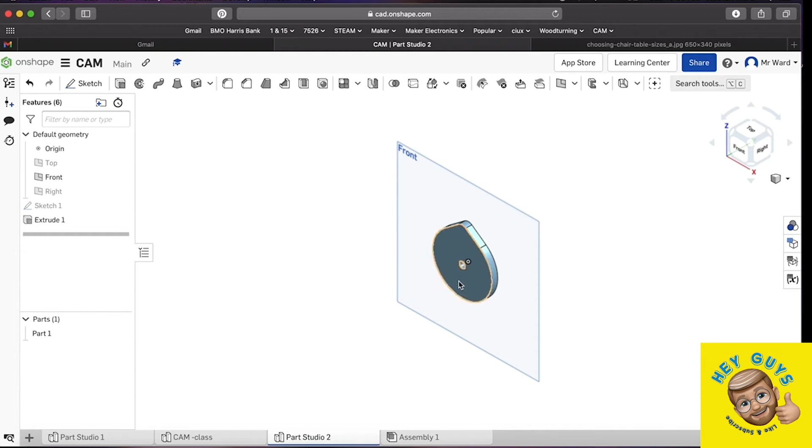So I created this cam right here. And if I needed to change the size of this cam, we all know that I would just go to the sketch, edit it, look at the sketch, and change the sizes.

But if I wanted everything to stay the same in terms of proportion to each other, but wanted to increase the size of the big arc to say a radius of 2 instead of 1.25, then I'd have to figure out the relationship between the 1.25 and that, which is pretty straightforward 1-to-1, but also from the radius of 1.25 to the small radius of 0.25. Now it starts to get a little more complicated. And you can see where if it was something more complicated like a chair, there'd be a whole lot more to change. So this is really where variables come into play and make a big difference.

So where do we find the variable tool? I showed you before where the plane tool is. If you hit that drop down, that seems to be the catch-all for everything they couldn't figure out where else it could go. Near the bottom is the tool called variable.

So if we click on that, we can see we have a number of different things to create this as. We could create a variable that's an angle or a number or really just anything, but we're going to go with length for this, and we're going to call this first one nominal size.

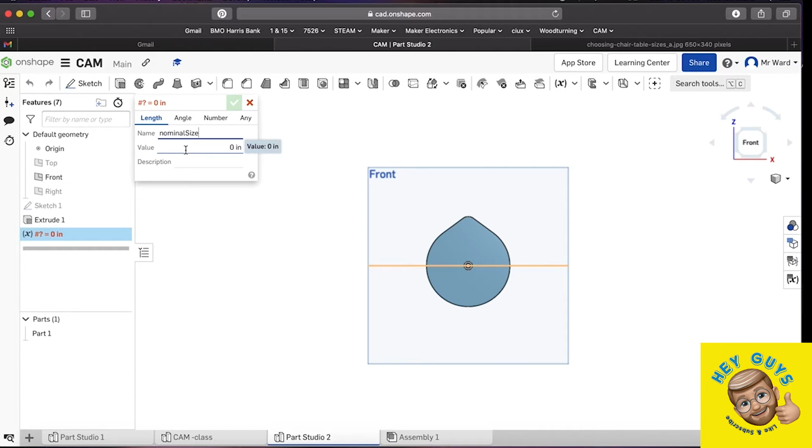If you're familiar with coding, you know that in many programs, they will only accept a single word - you can't have spaces. Sometimes you'll see an underscore used to separate words, but what we're going to do is keep the first word in all lowercase, we're going to call that nominal, and then just capitalize the second word, size. We call that camel case, because like a camel, there's a hump in the middle - the capital S gives us our hump. So we call that camel case, or bumpy case sometimes.

So if we set that nominal size to be 1.25 - why 1.25? Well, that seems to be an easy number when we consider the small radius was 0.25 and the big radius was... sorry, not 1.25, 2.5. All the original dimensions are a factor in 2.5. So 1.25 goes into it twice, 2.5 goes into it once, 0.25 goes into 2.5 ten times. And that's going to be the big deal.

So when we get to using these variables, we can use them in a mathematical expression, but it has to be in terms of being able to change the size uniformly. Our mathematical formulas either have to be multiplication or division. It can't be like nominal size plus 2, because then when we make nominal size smaller, it's still plus 2, and the proportions get weird. So it has to be either division or multiplication.

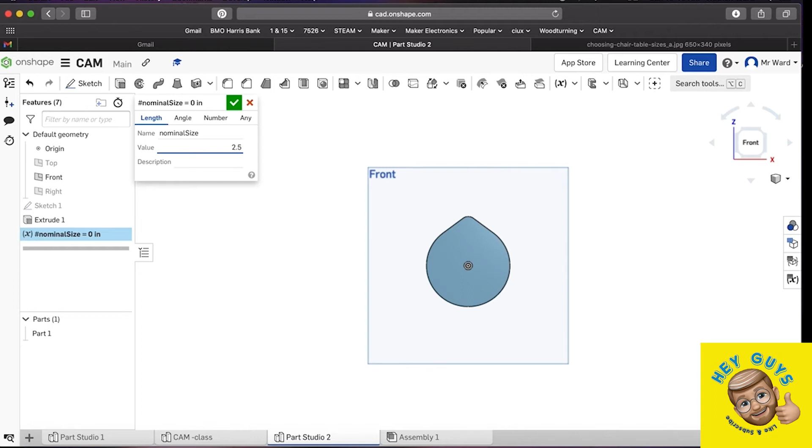So we're going to create that first, and then create another one. Now that it's on top of the list, I don't have to scroll down. We're going to call this hole diameter - just hole dia, since I don't want to write out diameter, but again using bumpy case. And I'm going to make that 0.25, because even if we change the size of the cam, we want the hole to stay the same.

And then we're going to create one more, and we're going to call that just THK - one word, which we're going to use to mean thickness, using computer autocorrect.

Let's make the T capitalized, and then maybe it won't try to change it on me. There we go. And we're going to make that 0.25. All right, that's just what it is already.

So in Onshape, here's something you got to get your head wrapped around. We created those variables down here in our features list, but our features list goes in order. So if I want to go back to sketch 1 and change these sizes to nominal to these variables we just created, the variables have to happen before we created the sketch. So if I was creating this sketch from the beginning and I knew I was going to use variables, I would create the variable first.

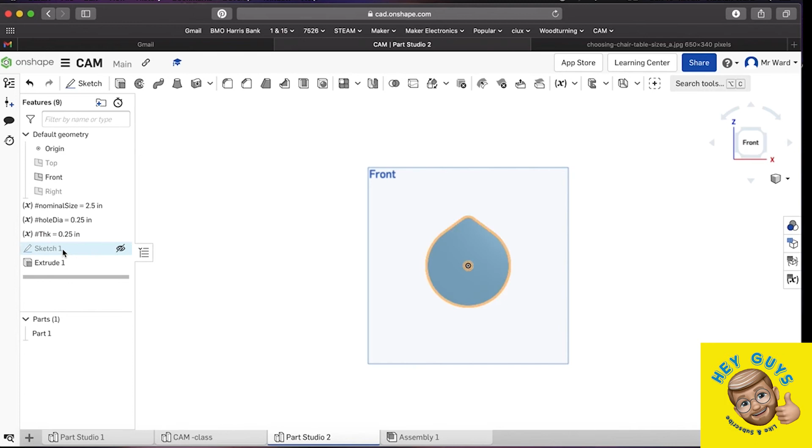Then we can go back in and edit our sketch, and instead of this being 1.25, since our nominal size is 2.5, we're going to say nominal, and as soon as I start to type it, it comes up, and I'm going to use the hashtag so that it's divided by 2. Because 2.5 divided by 2 is 1.25, right? So I'm going to hit enter, and it still stays the same, but if I double click on it, there it is, just like that.

So Onshape is always going to give me the numerical value that it is. But just know that when you double click on that, and this will be divided by 2 again, it'll show you what you entered. So don't go freaking out because, oh my goodness, it doesn't say nominal size anymore. It does, it's just underneath everything.

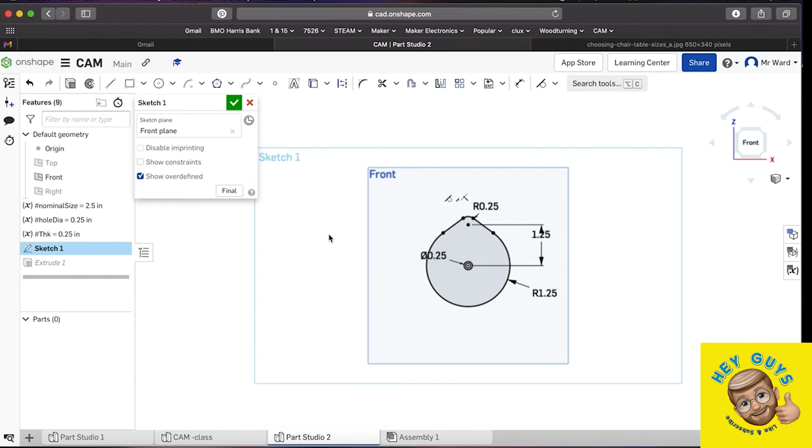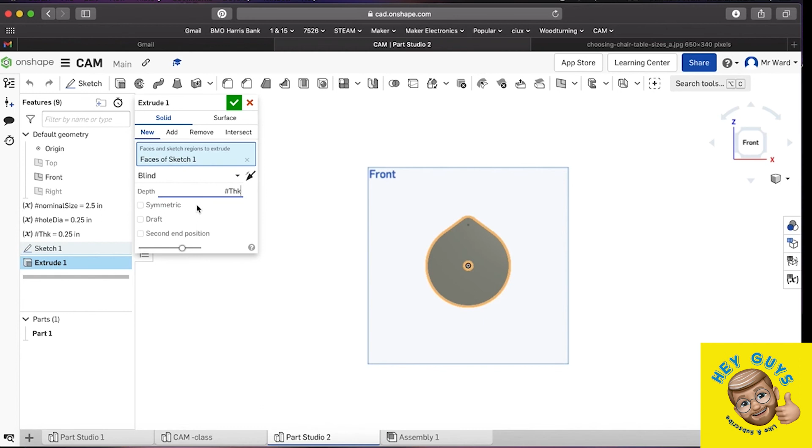So this is that small radius, so we're going to say nominal size divided by 10 so that we get 0.25. And then because we created hole diameter as 0.25, we're just going to call this hole diameter. We're going to check that. And then when we go to edit our extrude, we're going to change our depth from being 0.25 to just THK for our thickness.

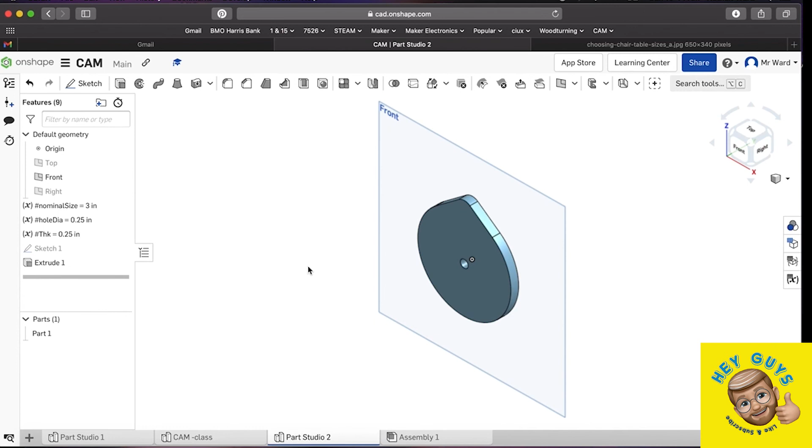So nothing changed, right? So what's the big deal? Well, if I do want to make this a little bit larger, all I have to do is come over here and double click on nominal size. It'll pull it up and I can change it to 3. And now, it's hard to tell because we don't have anything to compare it to, but now the size of everything is larger.

So look, the radius on that arc is now 1.5. The distance between the origin point and the center point of that arc is 1.5. And look at this radius, now it's 0.3, because we had nominal size divided by 10. So now nominal size is 3 divided by 10. Now that makes that 0.3.

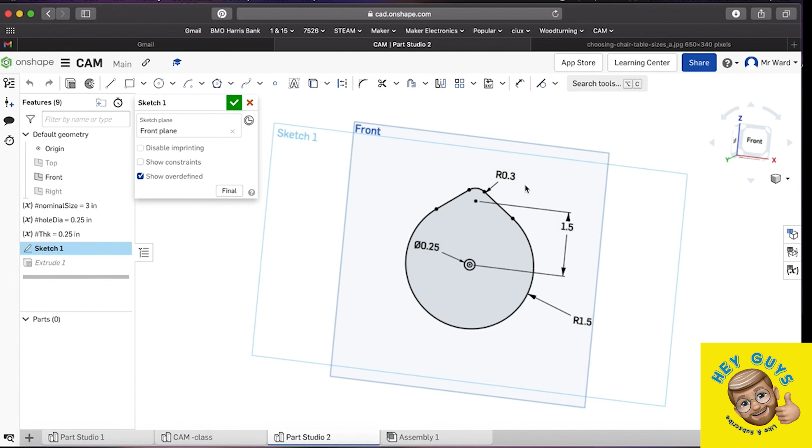So we were able to make a quick change using variables to change the size over here because we created these as mathematical expressions. And then we could do the same thing with our thickness, make it a little bit thicker or thinner, whatever we wanted to do. Let's say the hole didn't quite fit right, we can make a change just by changing that variable. So that's what variables are for.

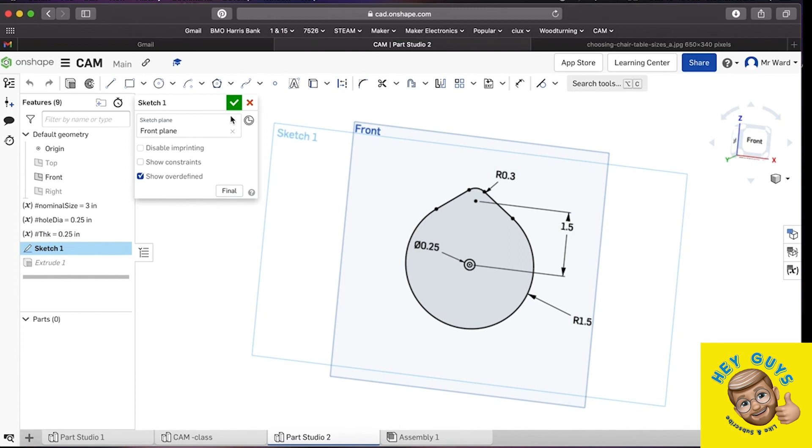That's how to create them. Remember, it's over here where plane is. Drop down, grab a variable, and then we just want to assign a number that corresponds with what we want our initial size to be. So if I'm creating a chair, I look at my overall dimensions from my initial sketch and measurements of what it needs to be, and I would find some number that works where either all my measurements are a factor of that measurement, or I would pick a variable that is a factor of all my other sizes.

All right, so hopefully that makes sense to you, and you were able to follow along. Remember, most importantly, you have to make sure that those variables show up on your features list before you start to use them.